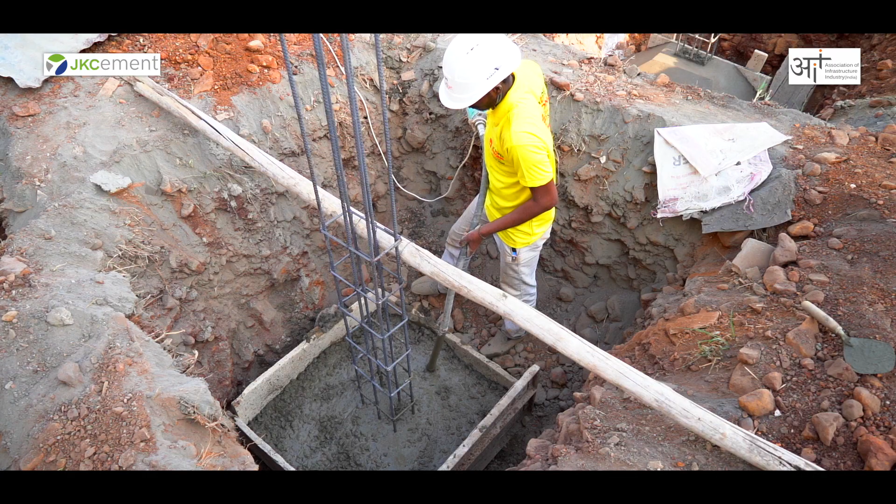For any individual, the major investment, the single major investment that a person makes in his entire lifetime is building a house.

And how do you want your house to be like? You and your family members. So all of you have to sit together, you have to decide.

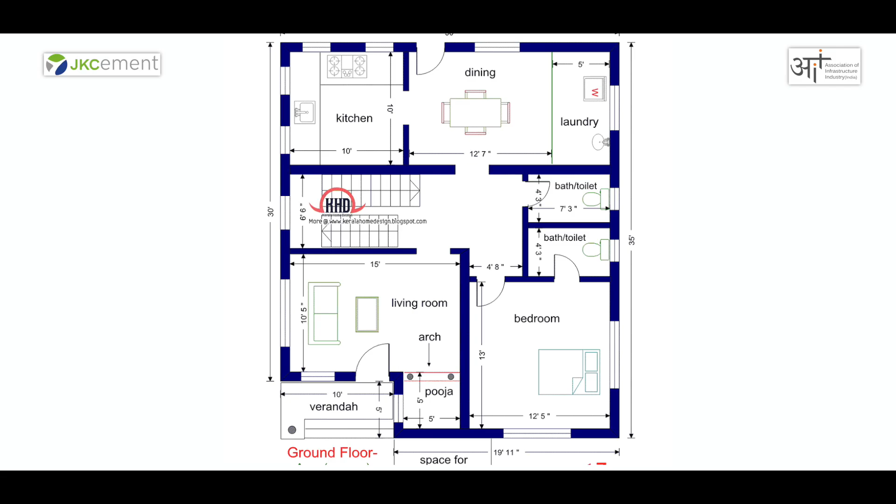When you have these discussions, then you can actually prepare a brief. You yourself may not really know how to have these things done. Therefore, you need the advice of an architect. Maybe an architect who is an experienced professional, he would actually tell you, look, this is fine, but I can suggest something much better than this.

You think something in your mind, but when you start conversing, when you start discussing, then things will fall in place, and then over a series of discussions, then things will become more clear.

When you are appointing the architect, what are the things that the architect is going to deliver, and what is the fees that you are going to pay him, at what stages you are going to make the payments. If these are discussed well in advance and agreed, then there should not be any problem.

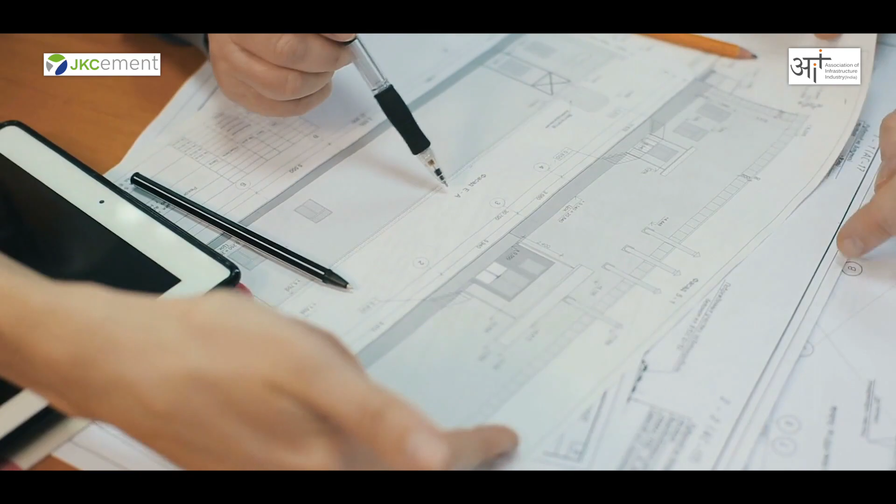The architect and the family members, all of them need to have a couple of meetings, and the architect has to understand, and all the family members should also be able to express themselves. So this is the first step.

Right on day one, you should say that this is my budget, and then the architect will ensure that everything falls within that budget. So specifications are important.

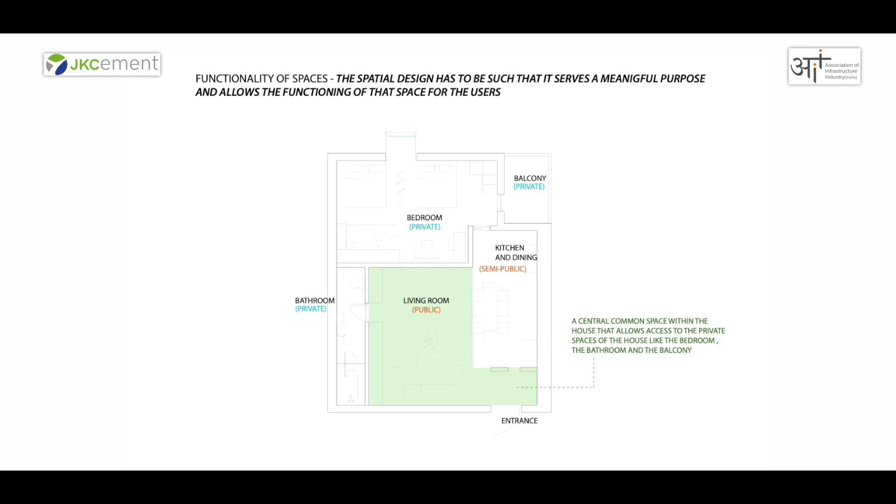Space is also very important. You have to make certain compromises, either in terms of space or in terms of specifications. So you can say that, okay, I will sacrifice Italian marble, maybe I'll go for a cheaper flooring material. I can save some money there, but then I want the space. I don't want to reduce the size.

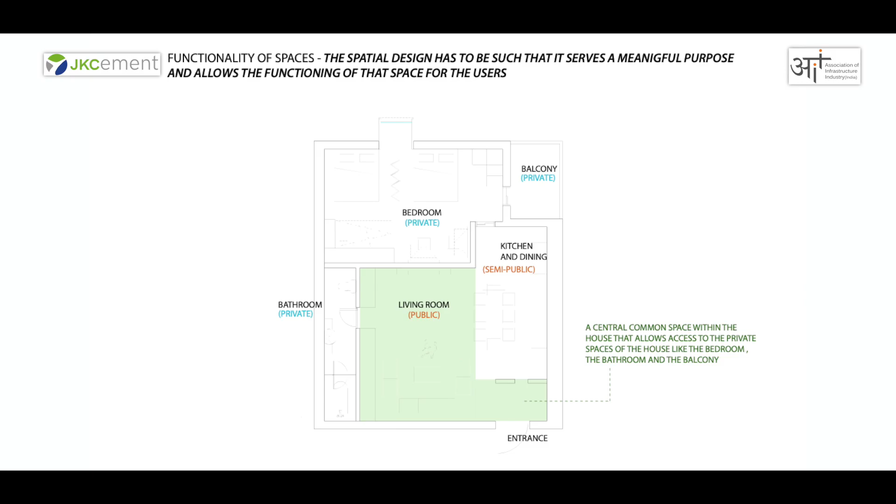Or I want to cut down on something else, or I will do something else at a later date when I get the additional funds. But then later on I can't get more space in my room. So therefore I'd rather first go in for a larger room and then spend on the other things at a later date.

But then of course there are externalities, like you don't know when the budget is going to come, when the price of cement or steel is going to increase. There are these things, because you plan for a project for a particular duration. But then, for some reason, if it goes on to 2 years, 3 years, then the next year's budget, excise duty and customs and several things will change, obviously. So with those things changing, the prices of cement and steel can increase.

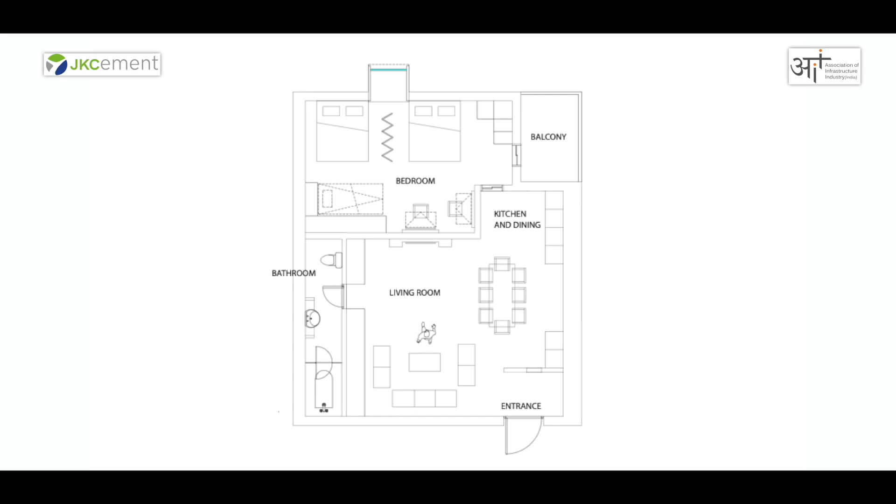Contingencies in every project, you have to plan for contingencies. You have to plan for some overheads. You have to plan for the unforeseen also. If you have 50 lakhs in your bank, don't tell the architect that I want a house in 50 lakhs, because there is always an unforeseen element. Prices may increase.

It's beyond the hands of many of us. So therefore tell him my budget is around 40 or maybe 45, because there is always something extra needed, for which you need to keep some amount of money in the bank.

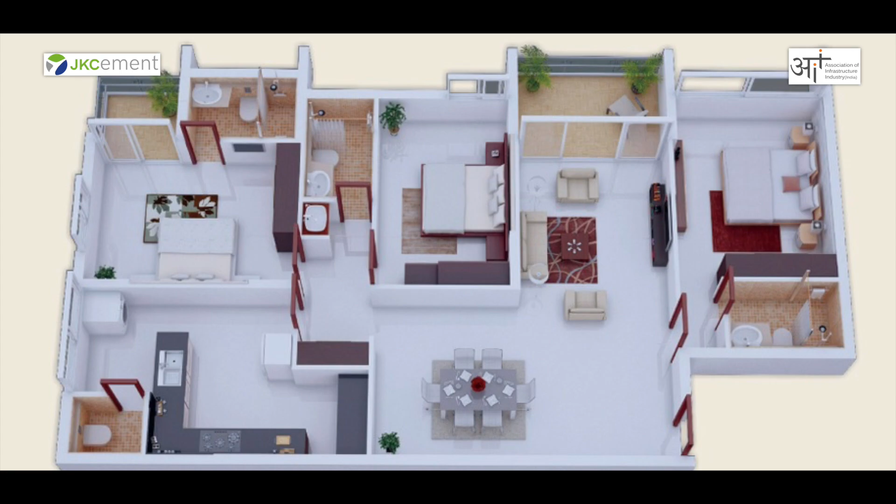Step 2 will be the architect developing a concept, and in that concept maybe he can do a walkthrough, prepare a first concept plan, an elevation. Sections are not required at this stage, just a plan, an elevation and maybe a 3D view, so that the family is able to understand and say yes, this is something.

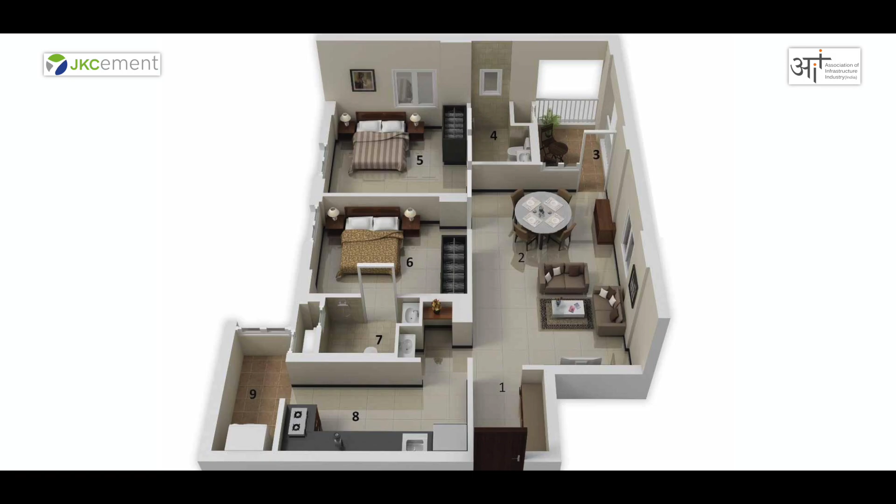Once that is done, then you move to the third step, where you look at the specifications and other things, because without that you can't really come down to the budget. If you're putting Italian marble or Kadapa stone, there could be a huge variation in the budget.

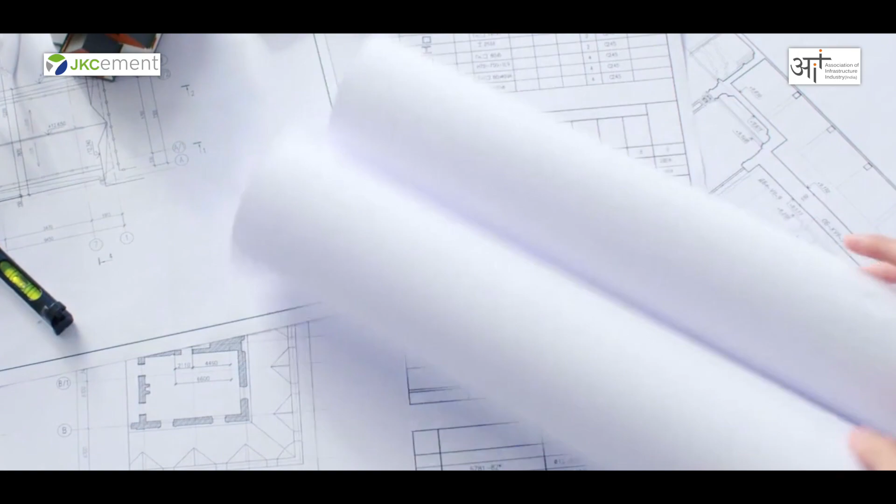So once those are done, then you move to step 4, where you go for the approvals. The drawings have to be put up to the municipal corporation or to the local body, whoever is the concerned agency, and you have to get approval for the permission to construct.

So once that is done, then you can't make changes. Therefore, before you reach that stage, it is important that things are finalized, and once that is done, then you need to appoint a contractor.

There could be different kinds of contracts. You could give a turnkey contract to the architect itself. Then the next process is, of course, looking for an auspicious date.

You have to do the Bhumi Puja, materials have to come in, construction has to start, commencement certificate has to be taken and work started, and then supervision is extremely important, because there can be so many things in the drawings, in the specifications, in your contract, but once something is put, you can't again start breaking it.

So extremely important is supervision, to ensure quality of the work is done, and while doing the construction there will invariably be some small minor tweaking that happens. Small changes are always possible. Major structural changes may not be possible, but small changes, please do it.

And while doing it, don't forget to put the cables inside the concrete or whatever, because quite often things are forgotten. So it's very important that all these nitty-gritties are taken into account, and once all this is done, then the final finishings and fittings, there again there is a lot of leeway.